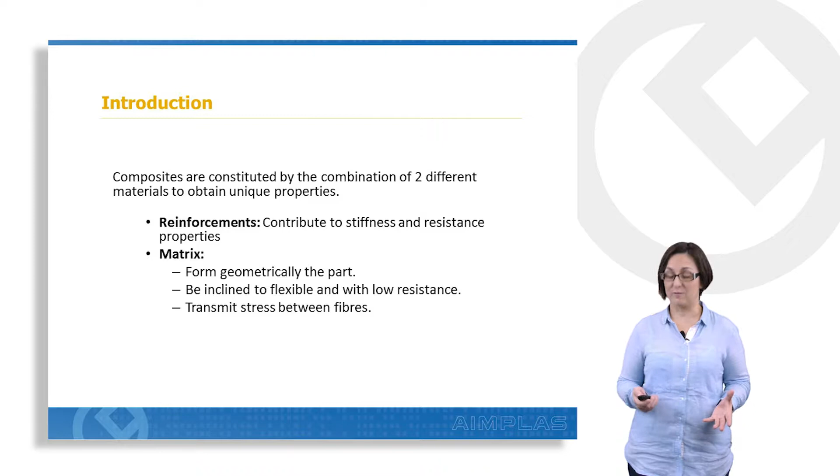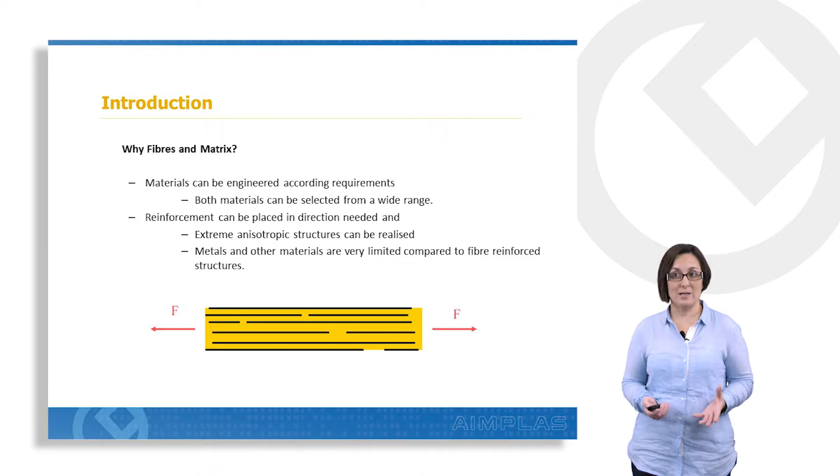Why do we use fibers and matrix? With these materials we can adapt to our requirements because we have a wide range of materials, so we can select them according to the final properties we need. It's also important to remark that reinforcement can be placed in the direction we need in order to obtain the final properties of the part. Metals and other materials are very limited in comparison with fiber-reinforced composites.

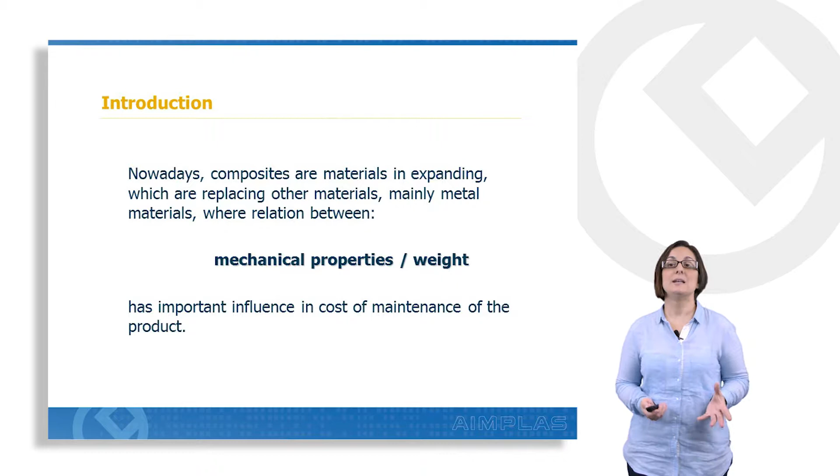Nowadays, composites are materials in expansion, which are replacing other common structural materials. The main reasons are related to the relation between mechanical properties and weight, and we have to take into account the influence on cost of the maintenance of these products.

Regarding mechanical properties, in this slide you can see mechanical properties of common structural materials. In this graph, we compare information related to common structural materials like wood, alloys, titanium, and steel, in comparison with different kinds of composite materials made with different reinforcements: glass, aramid, carbon, and so on. As you can see, except for steel, we have very good mechanical properties for composite materials compared to structural materials.

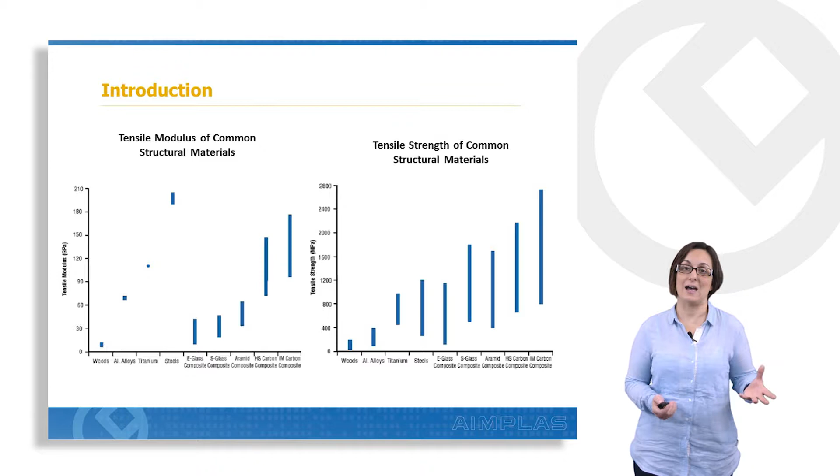I would also like to remark that we have a wide range of mechanical properties, so we can adapt, as I mentioned before, our final properties to our requirements, and select the suitable material for our final needs.

In this slide you can see the density of the different common structural materials I mentioned before. Steel has a high density, so in comparison we can obtain very good densities for composite materials. As I mentioned, composite materials have an important impact in different sectors because of the relation between mechanical properties and weight.

In this slide you can see this aspect. If we compare mechanical properties against the density of different materials, we see that composite materials have important advantages compared to other materials we find in the market. We can also identify the wide range of mechanical properties that we can obtain with different combinations of composite materials.

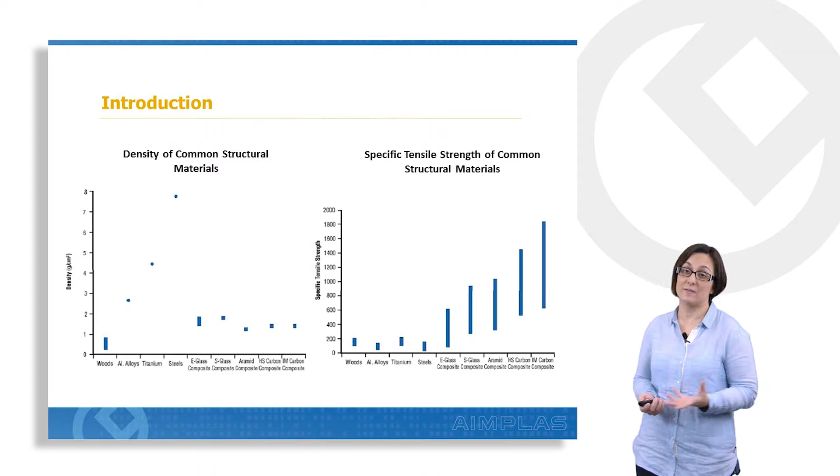As mentioned, composite materials have an important impact in different sectors, related to advantages such as weight reduction, specific mechanical resistance, and also corrosion resistance. This is the reason they are applied in sectors like marine and wet applications. They can provide electrical isolation, dimensional stability, and also high temperature resistance.

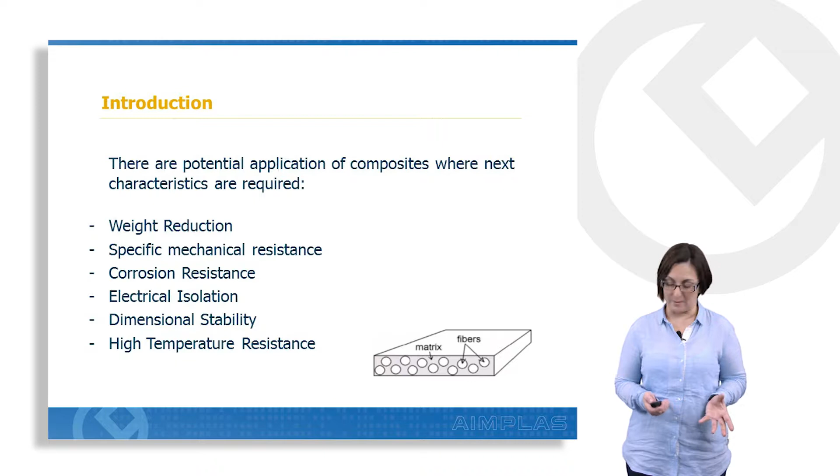Now we are going to move to the point related to raw materials, from which we obtain a final composite part. Here we have the matrix and the fibers. The matrix forms the part and provides flexibility, while fibers provide the mechanical properties. But we also have other materials, like fillers and additives, which can provide other properties, such as fire resistance.

In the case of matrix, we have different kinds: organic, mineral, metallic, and ceramic. We are going to focus on the organic matrix. In the case of fibers, we have different kinds, such as glass fibers, carbon fibers, aramid, and boron.

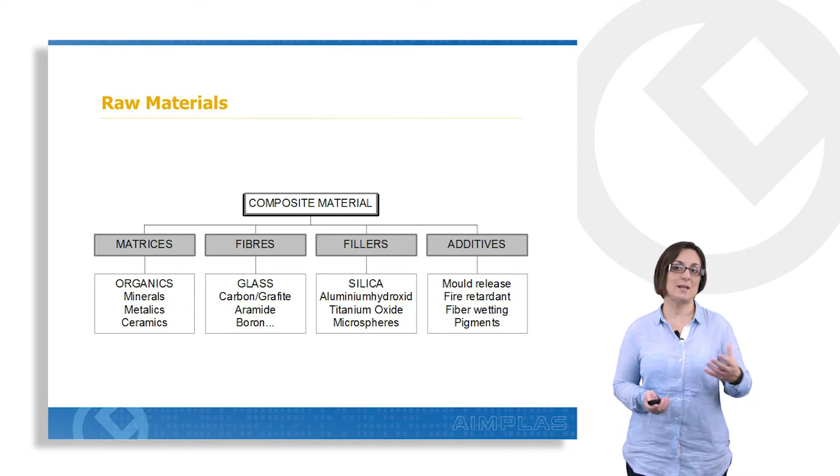First, I'm going to talk about the reinforcement I mentioned before. They provide mechanical resistance, stiffness, and hardness to the final part. We can classify these materials by origin: mineral origin and organic origin. In the case of mineral origin, we have inorganic fibers like glass, carbon, boron, ceramic fibers, and metallic fibers.

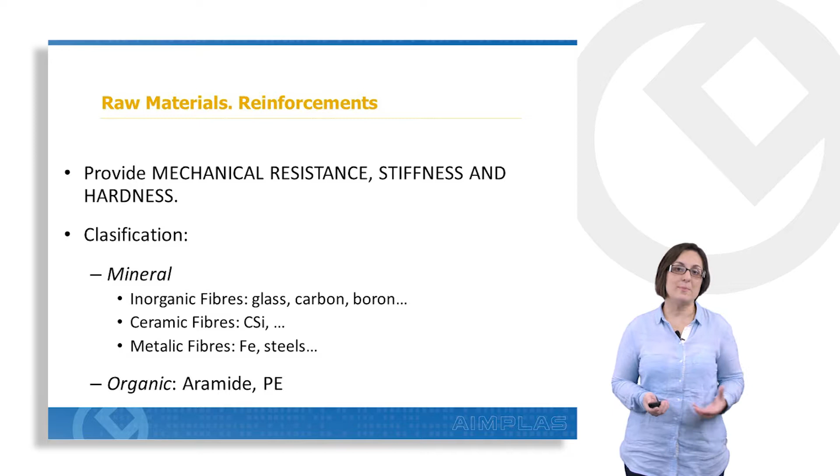Glass, carbon, and aramid are the reinforcements most used nowadays. Glass fibers are the most used because we can obtain good mechanical properties in relation to their price, and carbon and aramid fibers are used in specific sectors. Carbon fibers are mainly used in aeronautic sectors, and aramid fibers are used in sectors where impact resistance is the most important property.

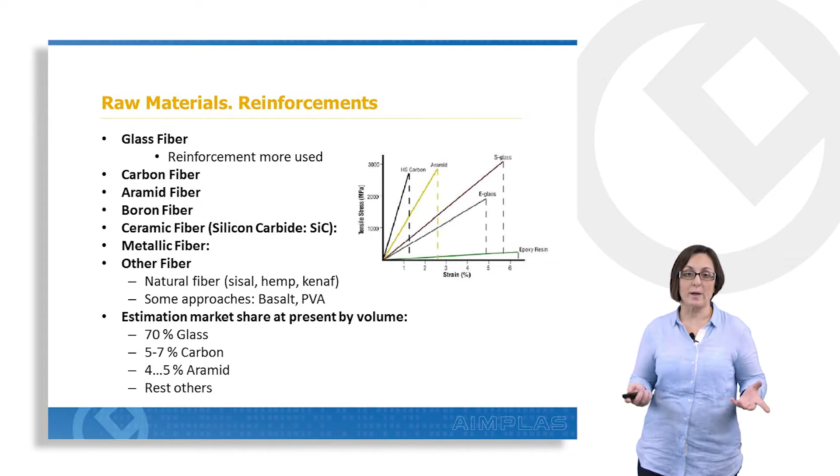We can also have different kinds of fibers, but nowadays natural fibers are gaining a good influence in the market. They are being introduced due to environmental issues, and today we have sisal, hemp, flax, and kenaf fibers in the market, covering this opportunity for the use of natural fibers.

Now we are going to move to the different presentations in which we can find the reinforcement. First of all, we have the chopped roving. It's a yarn of different fibers, which can be used normally in the spray-up process in order to obtain cut fibers, combined with a matrix. Normally these chopped rovings are formed by glass and combined with different polyester resin.

We also have other presentations like chopped strand mat. In this case, we have a ply of different short fibers, normally glass fibers, which can be used in hand layup applications and also combined with different parts made by hand layup in order to obtain better mechanical properties and better quality of the final part.

Also, we have continuous filament mat. It's similar to the chopped strand mat, but in this case the short fibers are longer than in chopped strand mat. So we can finally obtain better mechanical properties, and this kind of material can have more flexibility, so it can adapt to the form of the mold easily.

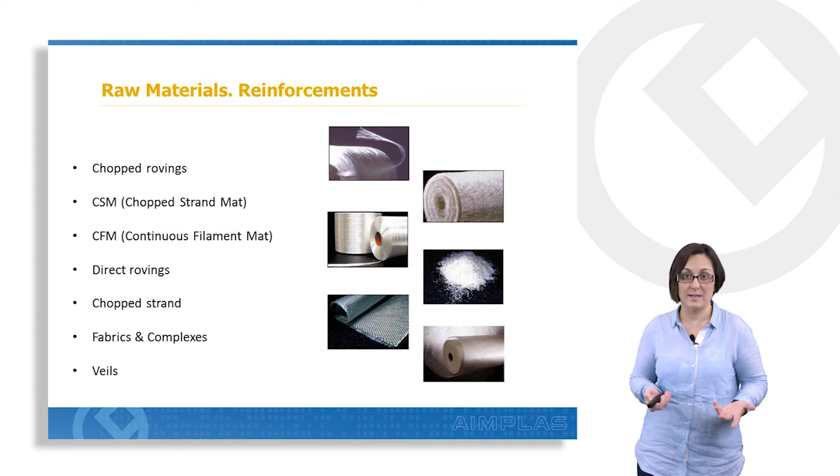Now we are going to move to the matrix, the other important part of composite materials. In this case, the matrix is an organic compound with high molecular weight, which is the product of a reaction of polymerization by addition or condensation of different compounds.

We have three types of matrix: thermoplastic, thermosets, and elastomers. But in this presentation, we are going to focus on thermoset matrix, which are used normally in combination with the different reinforcements that I mentioned before.

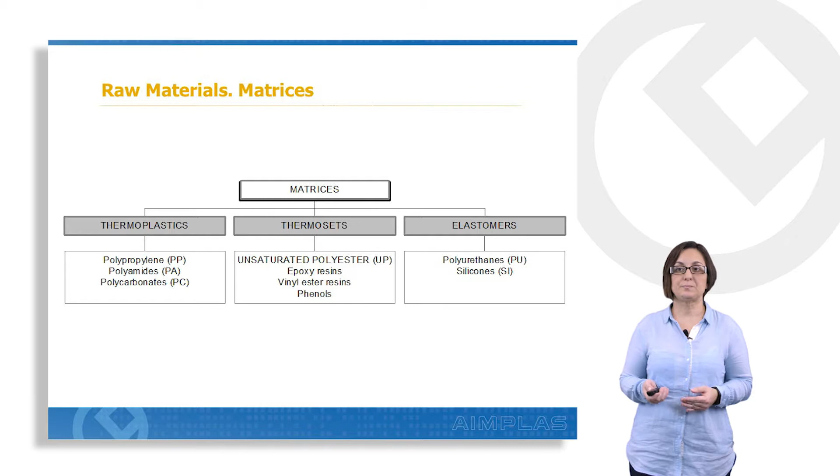But first of all, I would like to mention that thermoplastics and thermosets have an important difference. In the case of thermoplastics, macromolecules are joined between themselves by low intensity strengths, so they melt by heat. Different examples of thermoplastics are polypropylene, polyamides, and polycarbonates.

But in the case of thermosets matrix, the strengths of the joint of the macromolecules are very intensive, so these macromolecules could be broken before melting if the temperature is increased. Different examples are phenolic resins, epoxy, and polyester.

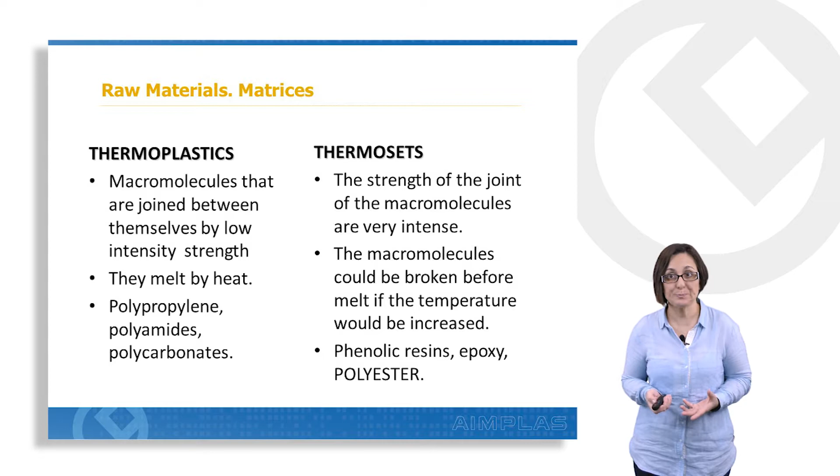In the case of resin matrix, I would like to remark on four types of resins. First of all, it's phenolic resins, which can be used mainly due to their good fire resistance. An example of phenolic resins is bakelite resins.

Also, we have vinyl ester resin, which is in the middle way between epoxy resins and unsaturated polyester resin, because it can be used like unsaturated polyester resin, but it has properties more similar to epoxy resins.

After that, we have the epoxy resins, which are used mainly in sectors with high requirements, for example aeronautic sectors. But we have to take into account that epoxy resins have restricted conditions in order to cure. But they also provide very good stability compared to other types of resins, which is why they are used in sectors with strict requirements.

Also, we have polyurethane materials. In this case, polyurethane is one of the most versatile materials that we can find, so we can obtain different types of polyurethanes: thermoplastic, thermosets, and elastomers. But in this case, I would like to focus on the fact that polyurethane is obtained by the mix of polyol and polyisocyanate in order to obtain the final polyurethane with different characteristics.

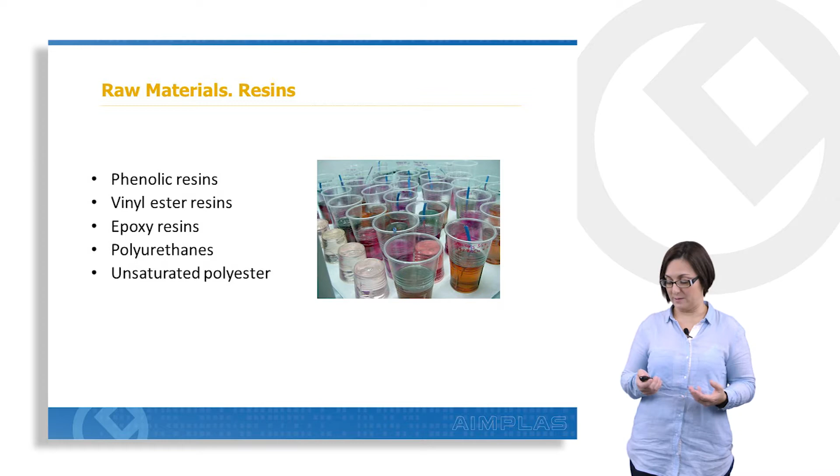The results of these projects can be adapted to shipbuilding, vehicles, aircraft, helicopters, and textile protection. The main topic in ballistic protection is the selection of the type of materials, in order to obtain a light material adapted to the different requirements established in the standards. So in this project we developed a material adapted to shipbuilding in order to protect it against ballistic attacks. Finally we obtained a reduction of 20% of the weight in comparison with traditional materials used for these applications.

Materials used in this project are mainly focused on aramid fibers. Aramid fibers, whose commercial names can be Kevlar and Twaron, are important due to their impact protection. Final applications have some advantages related to good mechanical properties regarding impact, and also lightweight and the possibility to use them in corrosive environments.

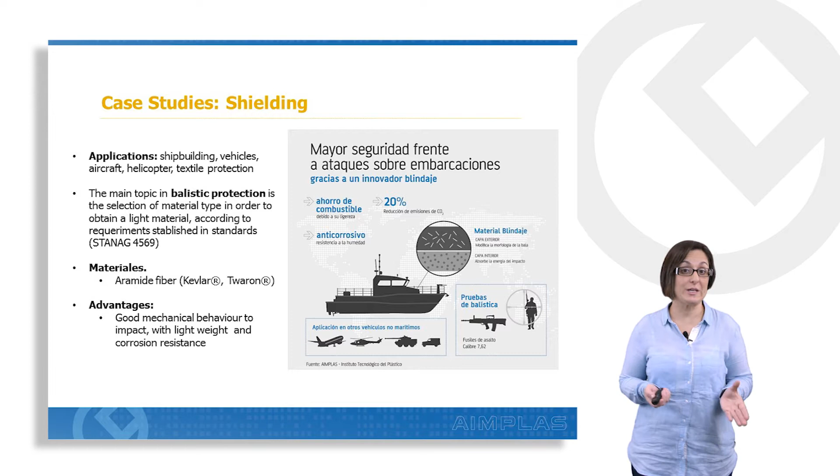Next case study is related to the Valencia Port Lighthouse. This new lighthouse is located in the north extension of Valencia Port. This infrastructure is made of composite materials, and it has a height of 32 meters. In this project, Acciona Infraestructuras was in charge of the construction of the lighthouse, Autoridad Portuaria de Valencia was the agent of the project, and AIMPLAS participated as technical assistant to Valencia Port.

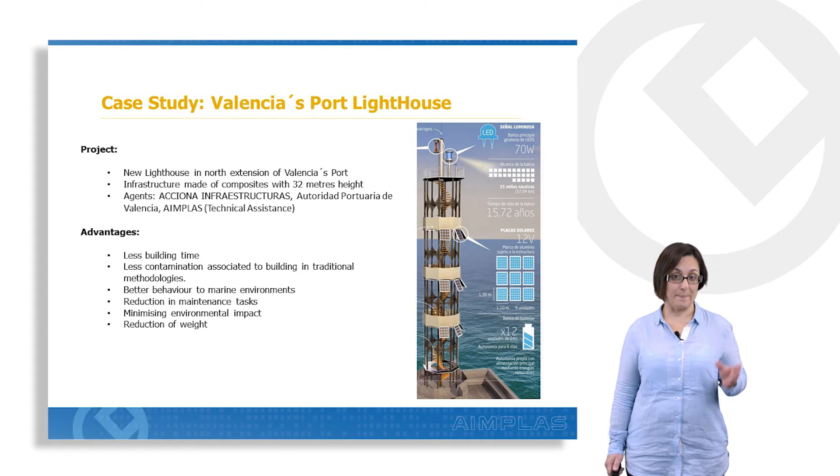These materials have good behavior in corrosive environments, so maintenance is better in comparison with other traditional materials. Also, we have to take into account that we can reduce the environmental impacts of the different building materials if we use these composite materials. The most important advantage is the reduction in weight.

As we can see in the next images, here is the moment the lighthouse was located at Valencia's Port. This lighthouse was fabricated in Madrid, in Acciona facilities, and was transported by road to Valencia's Port. This is the moment in which the lighthouse was placed in its final location.

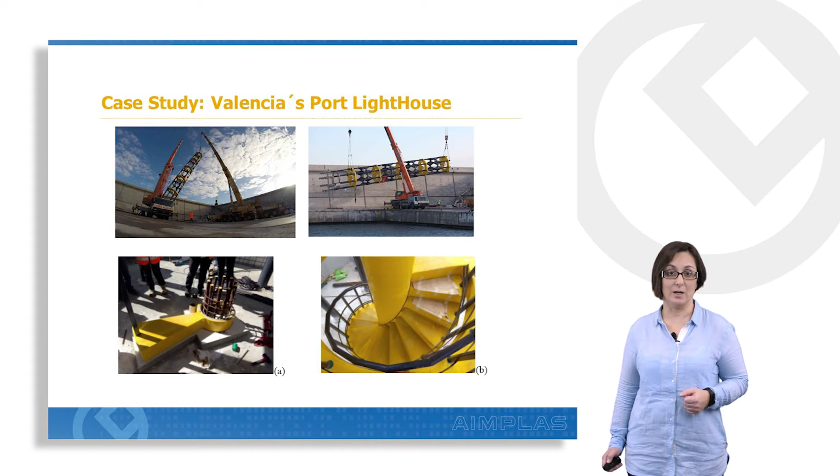In the other images you can see the different steps of the stairs, the inside stair of the lighthouse, which was also made of composite materials. In this case, the process to obtain these different steps is RTM, resin transfer molding, and these stairs were made using glass fibers and different resins, as I mentioned before.

In the next slide, you can see also the final position of the lighthouse in Valencia's Port. Here you can see the different components of the lighthouse, including the profiles obtained by pultrusion process, stairs obtained by RTM process, resin transfer molding, and different structures made by pultrusion or infusion process, common processes in the production of composite materials.

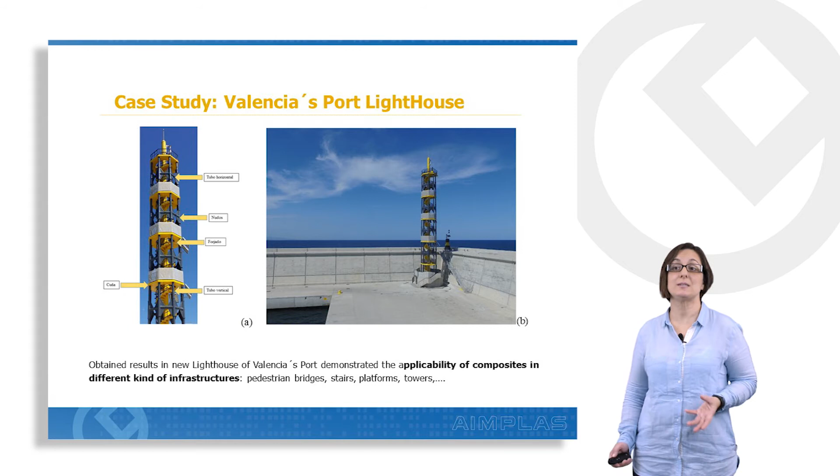So with the results obtained in the new lighthouse of Valencia Port, we can demonstrate the applicability of composite materials in different kinds of infrastructures, like pedestrian bridges, stairs, platforms, and towers, for example.

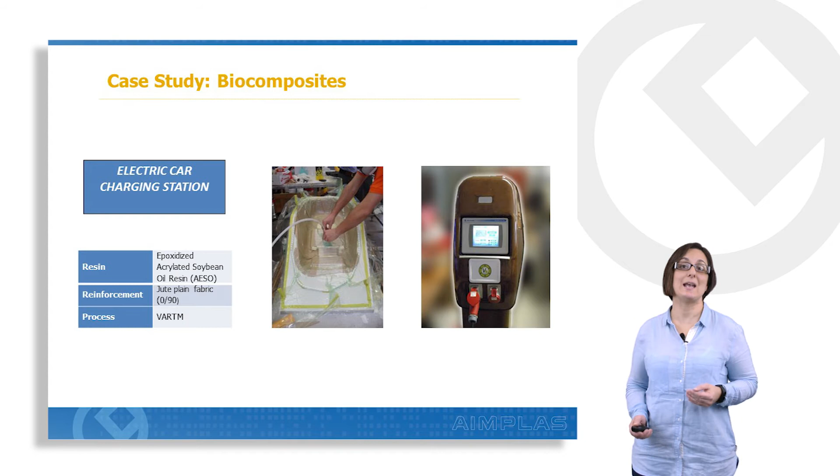Now we are going to move to another case study, biocomposites. As I mentioned at the beginning, natural fibers have an important impact nowadays in the composite sector. In this slide you can see different applications of biocomposites, natural fibers and bioresins provided by renewable resources. In this case you can see an electric car charging station made of jute plain fabric and an epoxidized acrylated soybean oil resin, processed by VARTM process, vacuum assisted RTM, vacuum assisted resin transfer molding.

In the next slide you can see also different case studies produced using biocomposites in different European projects in which AIMPLAS participated. Here you can see a grit container made of bio-based unsaturated polyester resin and also furan resins combined with flax and hemp fabrics, made by wet compression molding. Also here you can see a motor cover made of bio-based unsaturated polyester resin and flax and hemp fabric, produced by light RTM, light resin transfer molding.

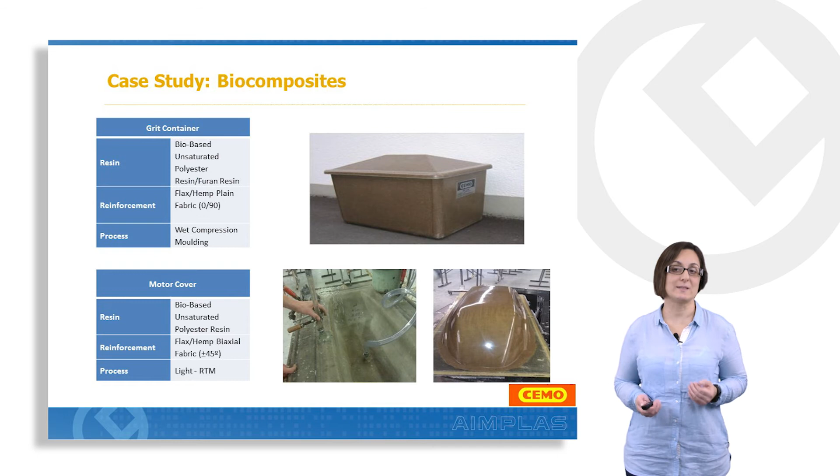Finally, as a summary, we can conclude that plastics and composites are a real alternative to be used in different sectors due to their important advantages such as weight reduction, easy assembly, maintenance, and flexibility regarding design, among others. We explained different case studies in which these materials are used, like shielding, which demonstrates that it's possible to use composites in the shielding sector due to the lightweight and these materials being adapted to the standards of these sectors.

For example, STANAG 4569 at level 1. And also in the case study in which we explained the lighthouse of Valencia's Port, we can demonstrate the applicability of these materials in this kind of structure. I would also like to remark that biocomposites are a clear alternative due to an additional reduction in weight, due to the low density of the materials, and also taking into account environmental issues.

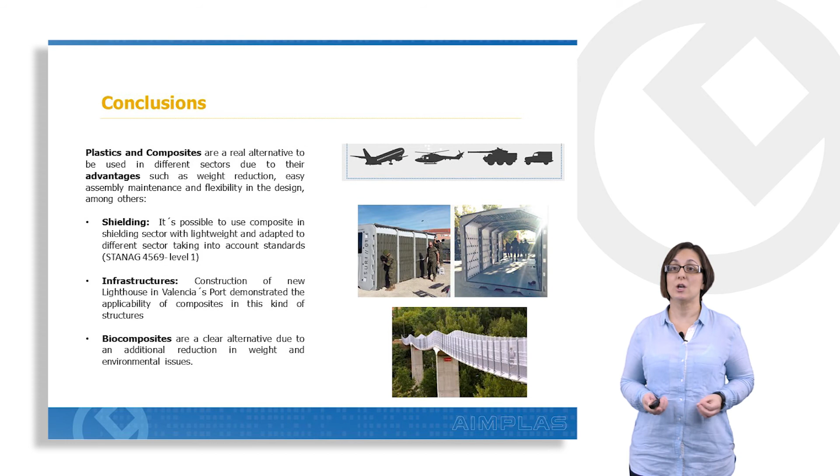So, finally, I would like to remark that plastics and composites can be used in different sectors due to the different advantages that we mentioned before. So, thanks for your attention.